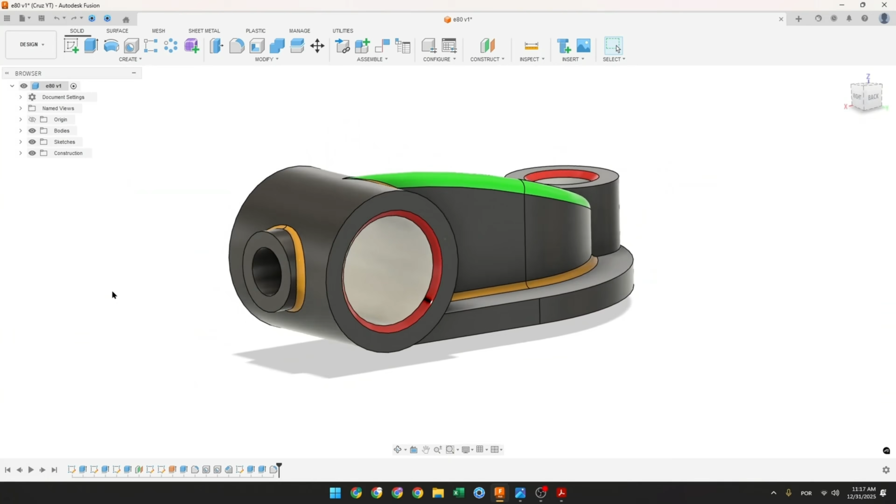Let's make one more tutorial in Autodesk Fusion. In this video, you learn how to use the extrude surface, offset plane, fillet, chamfer, and hole. So open Fusion and let's go.

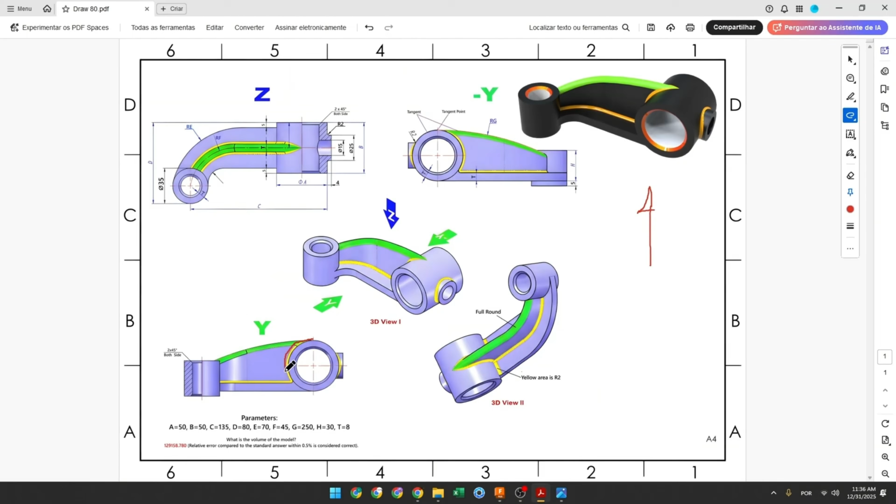The first step to create this part, we will make this cylinder. We will select the front plane. The diameter of this cylinder is A, 50 millimeters, and the length, letter B, is 50 millimeters. Let's create this. Go to create a sketch and select the front plane.

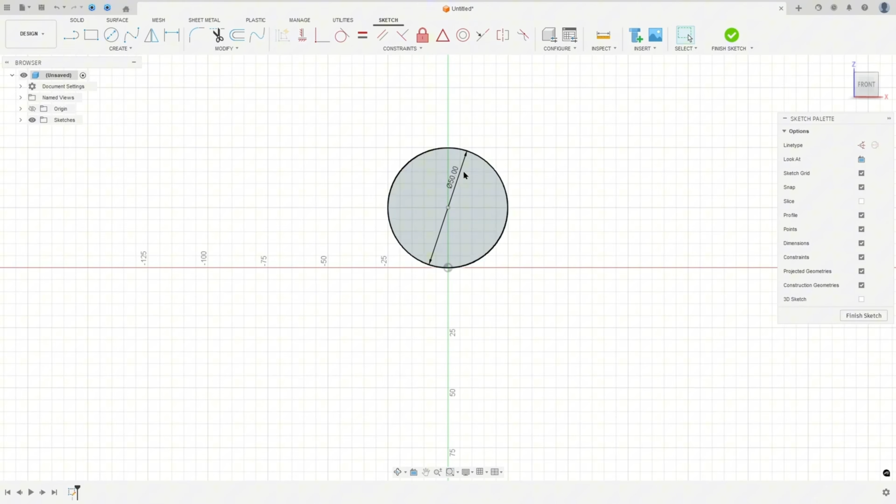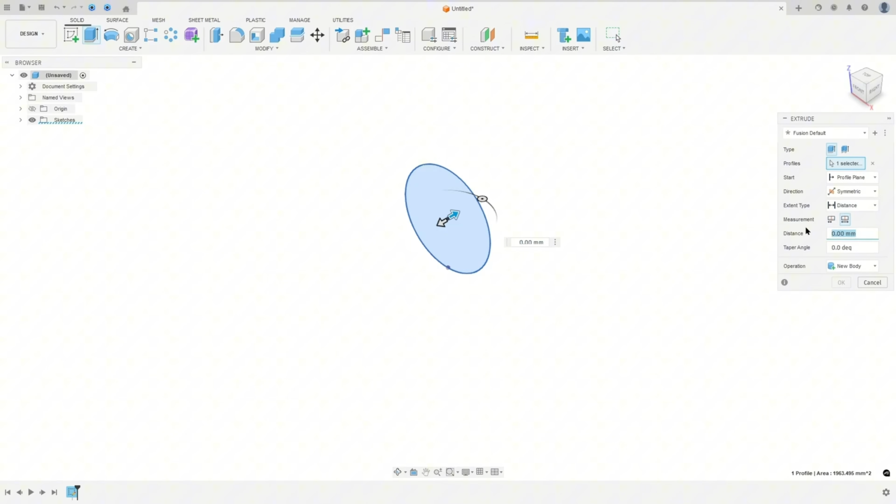Select a circle. Make a circle with 50 millimeters of diameter. Go to constraint, select horizontal vertical, select this point and the midpoint. Select coincident, select this circle and the midpoint. Finish the sketch. Go to extrude. The direction symmetric, measurement whole length, and the distance 50 millimeters. Operation new body and press OK.

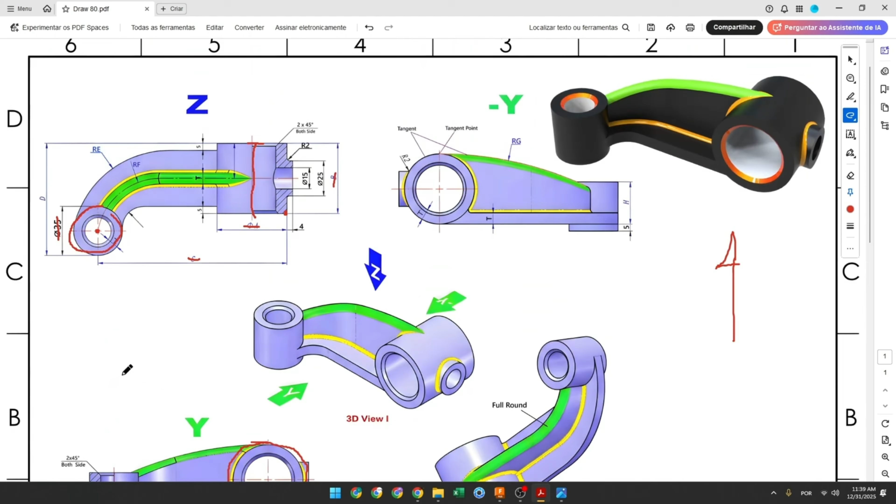Now we will create this cylinder. The diameter is 35 millimeters, and the distance between the center of the cylinder and this edge here is 135, and the distance between this edge here and this edge here is 80 millimeters. So go to create a sketch and select the top plane.

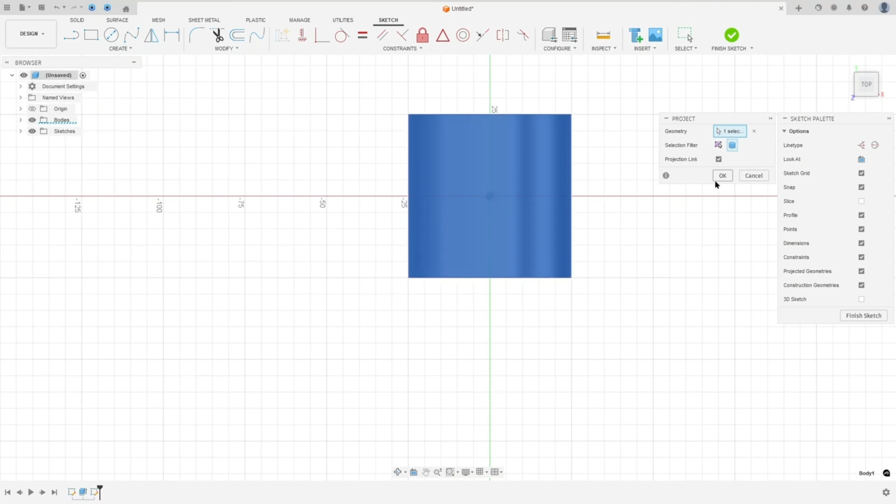Go to create, select project, include project. Selection filter, select the bodies, select this body and press OK. Now select the circle. Make a circle with 35 millimeters of diameter.

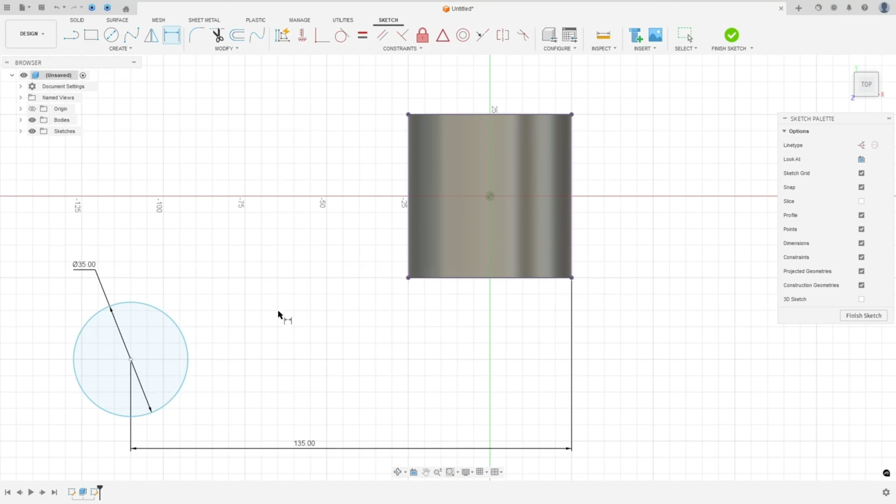Go to sketch dimension. The distance between the center of the circle and this edge is 135. Click here and on this line. Click with the right button here and select Pick Circle Arc Tangent. Select this point here. The distance here is 80 millimeters.

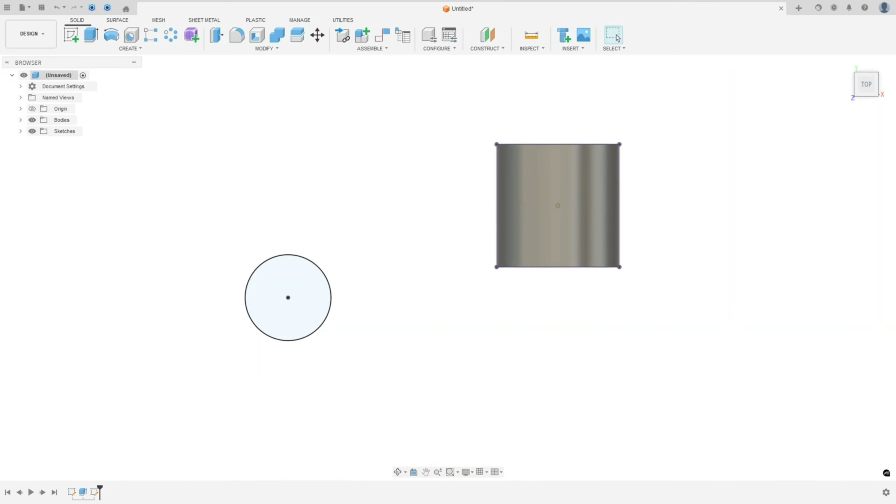Finish the sketch. We need to extrude this 5 millimeters to this side. The plane is here, so we need to extrude 5 millimeters here. And to the other side, we need to extrude 30 millimeters.

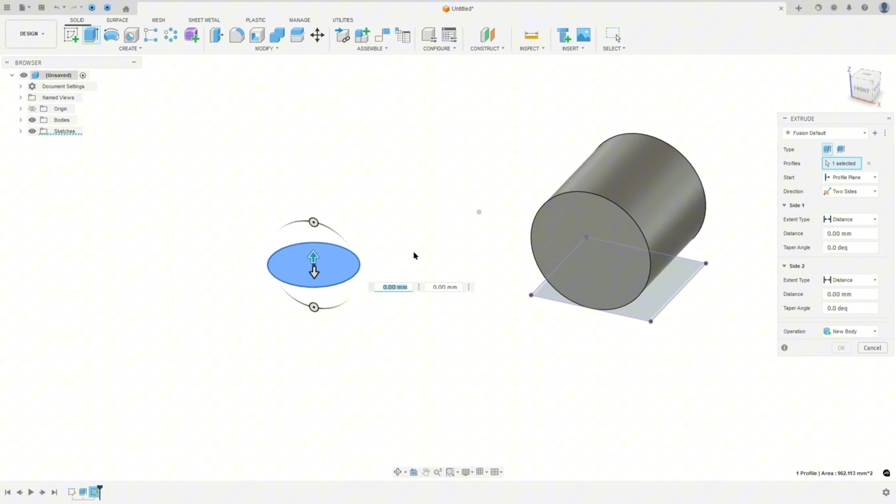So go to extrude and select this profile. The direction, select the two sides. This side here is 30 millimeters and side 2 is 5 millimeters. Operation new body, press OK. We made these two cylinders here.

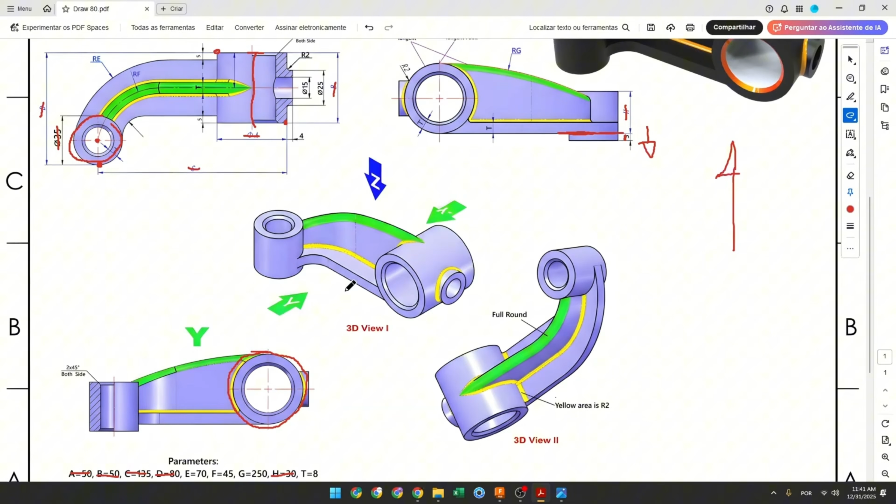Now we'll make the base. So we will create this base here. The base has an arc here, tangent with this circle and tangent with this line. The radius here is 70 millimeters, and the distance between this line here and this line here is 5 millimeters.

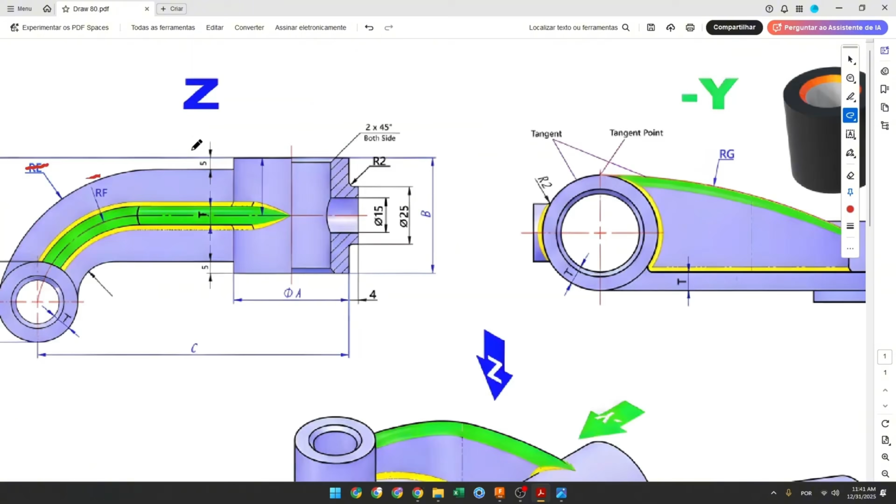So let's create this. Go to create a sketch and select the top plane. Go to create, select project, include project. Select this body here and this one and press OK.

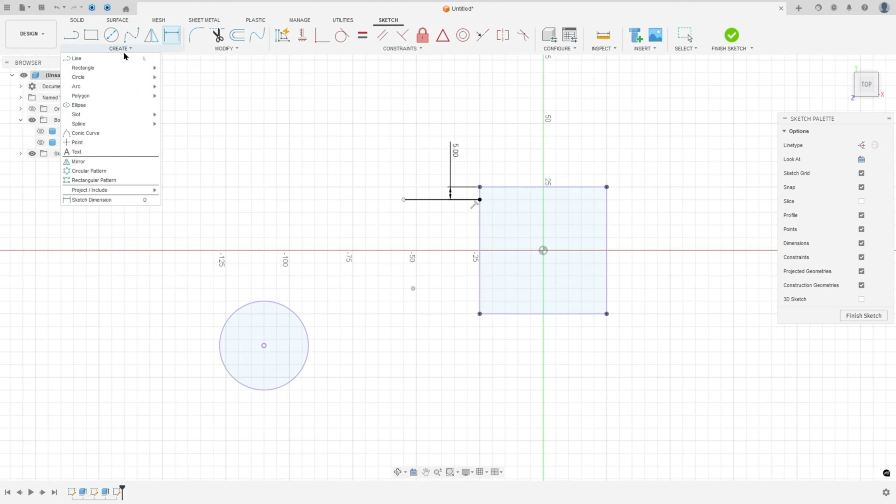I will hide this a little bit. Select line, make a line here. Go to sketch dimension. The distance here, 5 millimeters. Go to create, select the arc, 3-point arc. Click here in this point and this circle, make an arc here.

Go to constraint, select tangent, select this arc and this line, and this arc and this circle. The radius here is 70 millimeters.

Now on the other side here, we have a line with 5 millimeters, and we have a fillet here. The radius here is 15.

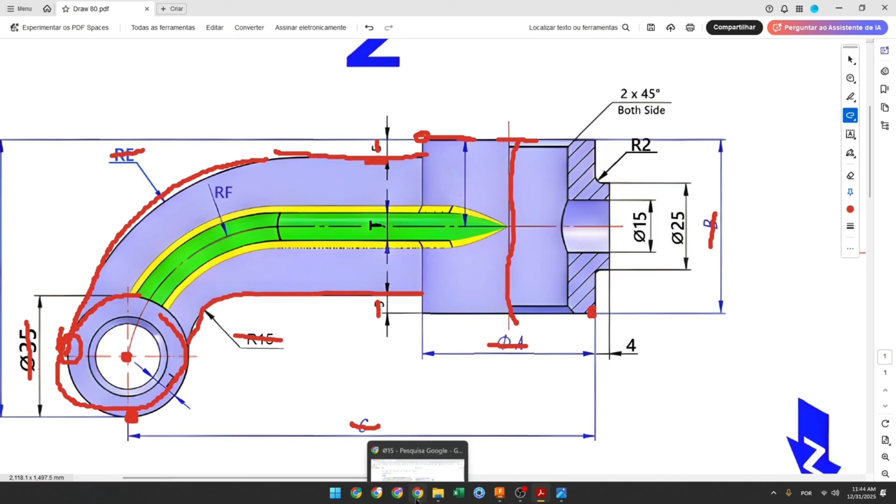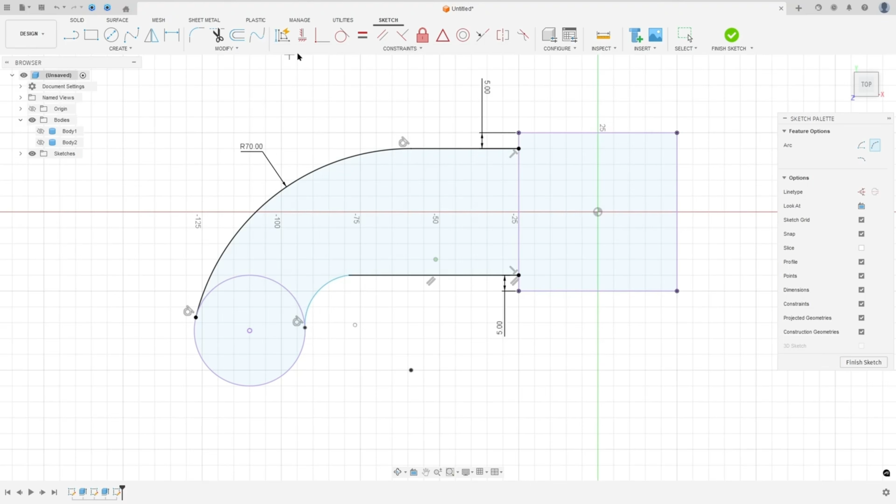So let's create this. Select line, make a line here. The distance between this line and this one is 5 millimeters. Go to create, select the arc, 3-point arc, make an arc here. This arc must be tangent with the circle and tangent with this line. The radius here is 15 millimeters.

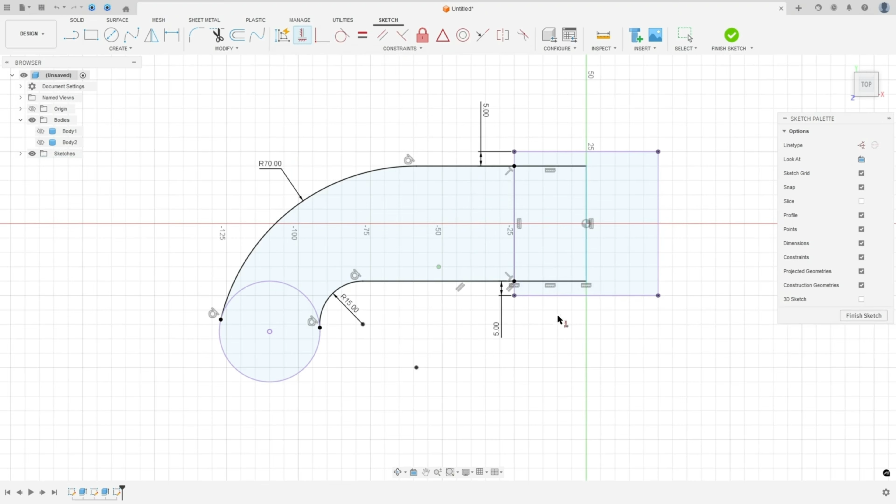And select the 2-point rectangle and make a rectangle here. Go to constraints, select horizontal vertical, select this point, and select this point and the midpoint. We will use this to make the extrusion here, to extrude this side here.

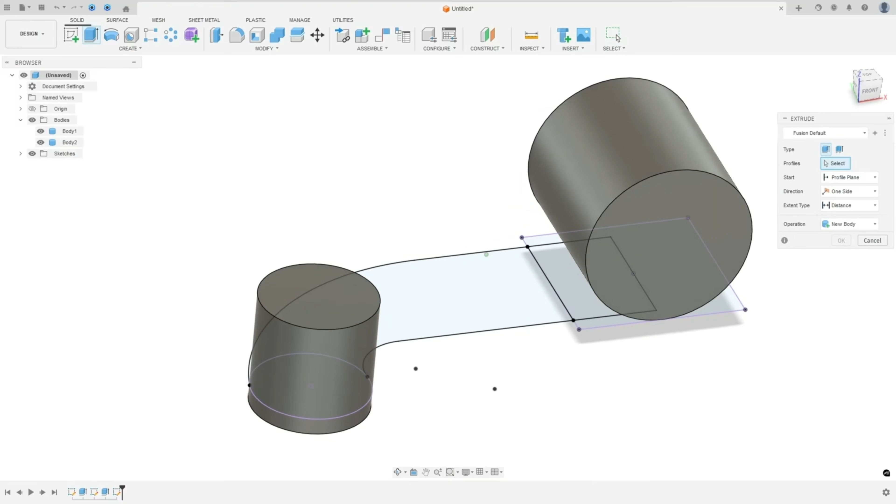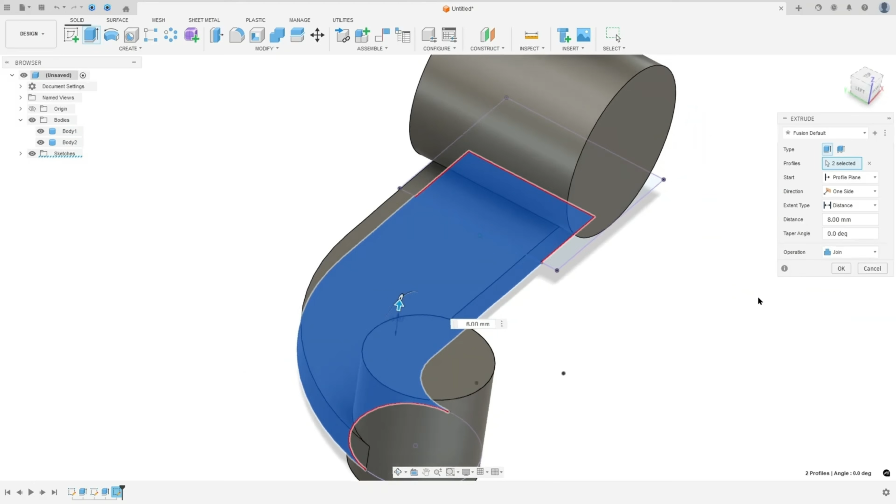Finish the sketch, show body 1 and body 2, and here go to extrude. We need to extrude the base 8 millimeters, letter T. So select this profile. The distance here is 8. Operation join, and press OK.

We made this. Now we will create this pipe here. The diameter is 25 millimeters, and the distance between this face here and this body here is 4 millimeters.

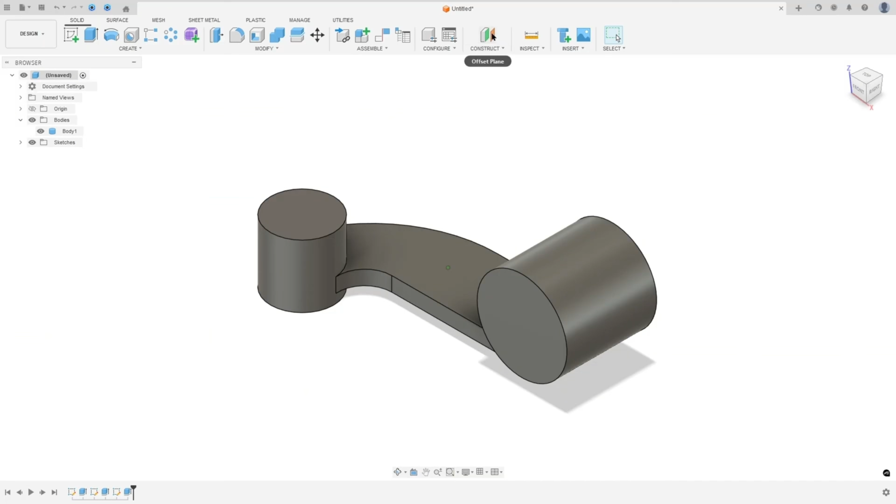So let's create this circle. Go to offset plane, select the right plane. The distance here will be 25, that is the radius of the circle, plus 4, that is the distance here.

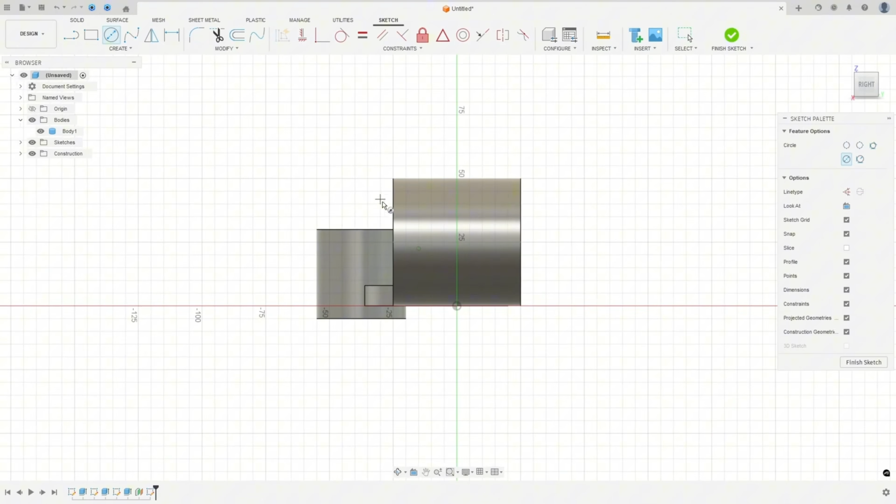Press OK. Go to create a sketch and select this new plane. Select the circle, make a circle here with 25 millimeters of diameter. Go to sketch dimension. The distance between this circle and the midpoint here is 25.

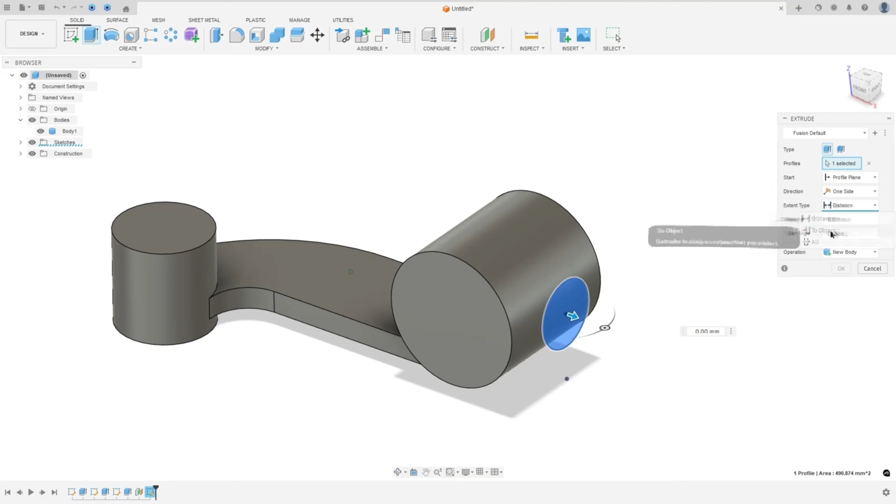Go to constraints, horizontal, select this point and this point here. Finish the sketch. Go to extrude. The direction, one side. The extent type, to object, select this object. The extend, select your adjacent face, operation join, and press OK.

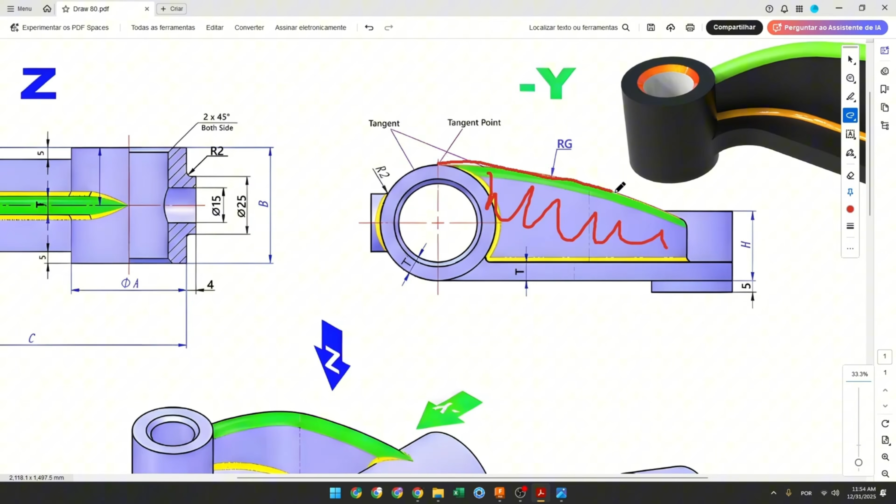And now we will create this rib. The first thing we make to create this, we will select the front plane and create this arc here. The radius is 250 millimeters, and it is tangent with the circle, and the center of this arc is vertical with this point here.

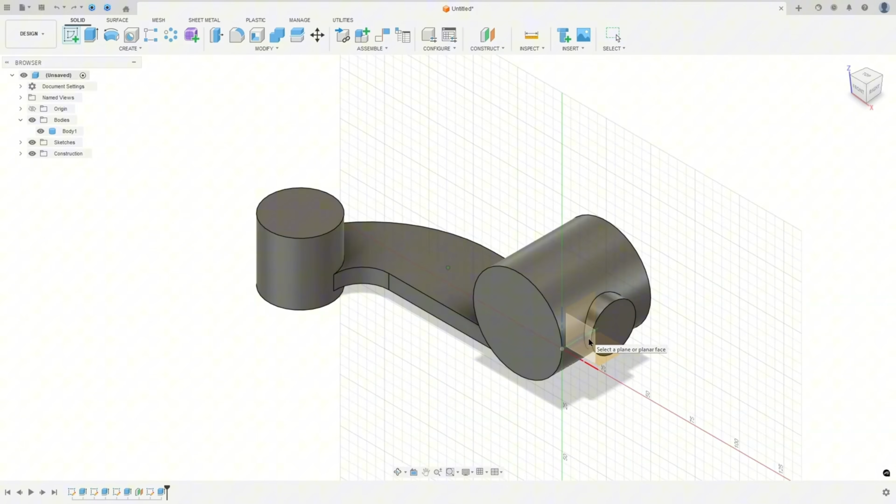So let's create this. Go to create a sketch and select the front plane. Go to create, project include, project, selection filter, select the body, select this body and press OK.

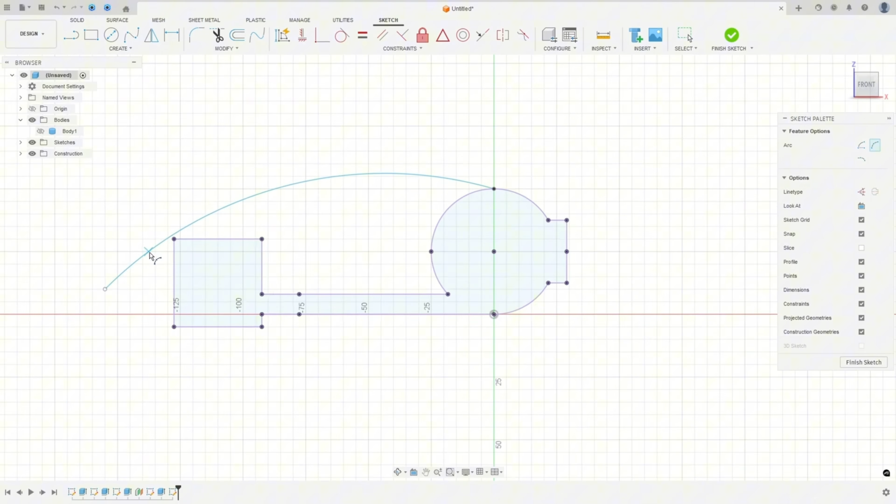Here go to create and select the arc, 3-point arc. Select the circle, make an arc here. Go to constraint, select the tangent, make this arc tangent here. Go to constraints, horizontal vertical, select the center of this arc and the midpoint. The radius here, 250 millimeters.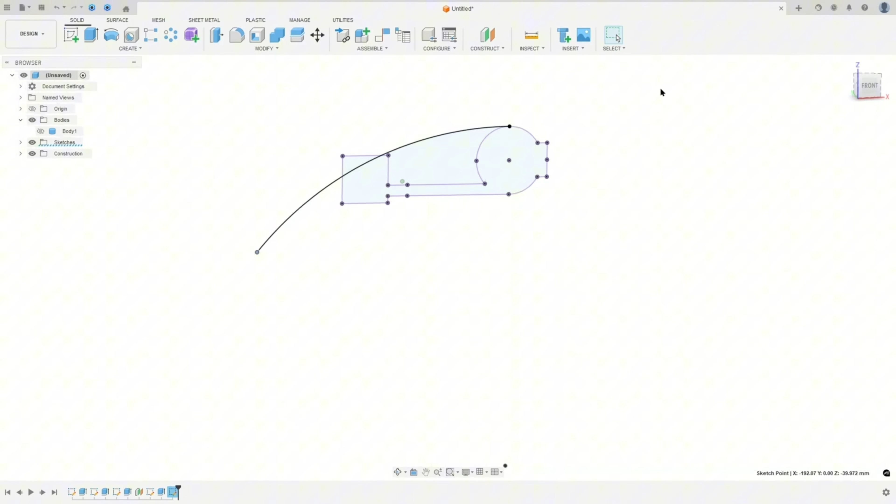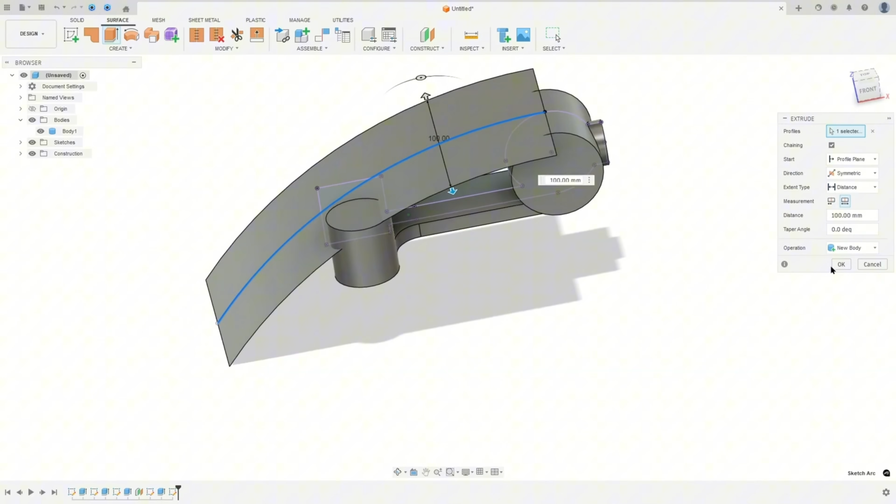And finish the sketch. Now go to surface and select this profile here. Go to extrude. The direction, select symmetric. Measurement, whole length. The distance here can be 8 millimeters or 100 millimeters, no problem. Operation new body and press OK. We made the surface here.

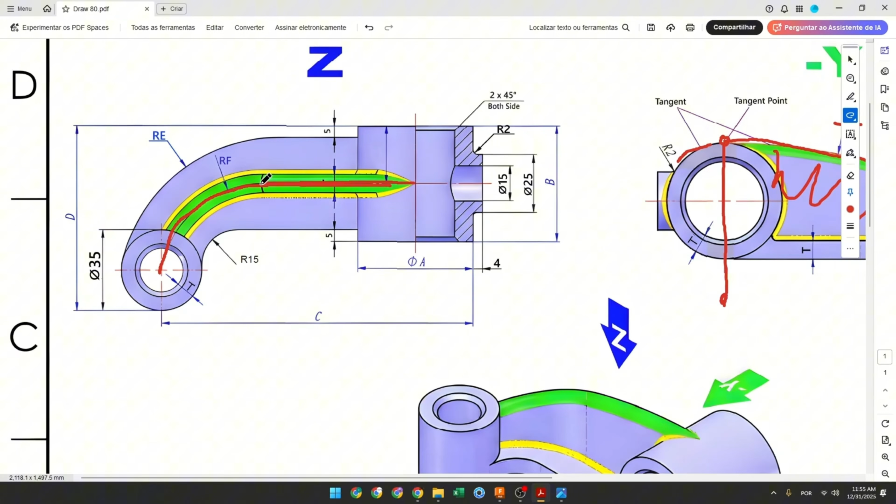Now we will create this profile of this rib. So here we have a line and we have an arc here. This arc has 45 millimeters of radius and it is coincident with the center of the circle. So we'll create this.

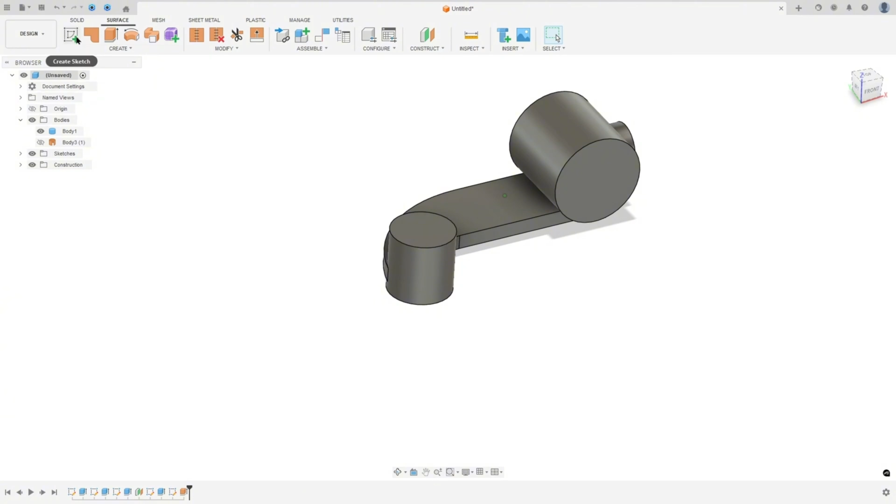Go to create a sketch and select this face here. Go to create, select the Project / Include, project, select this body, press OK, and select a line, click here in the midpoint, make a line here, and make an arc here.

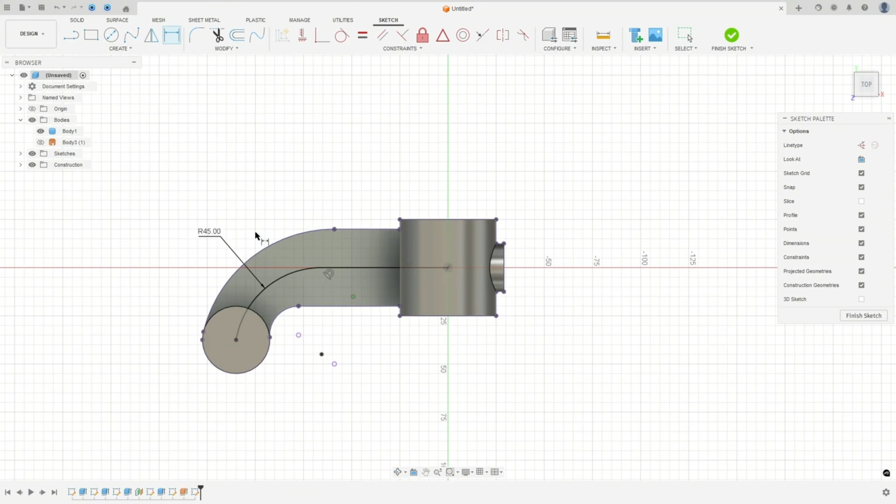Go to sketch dimension, the radius here 45 millimeters. Finish the sketch and show the surface. Go to extrude, the type select thin extrude, the profile select this profile, the direction one side, the extent type select to object, the object select this surface, the operation here is join.

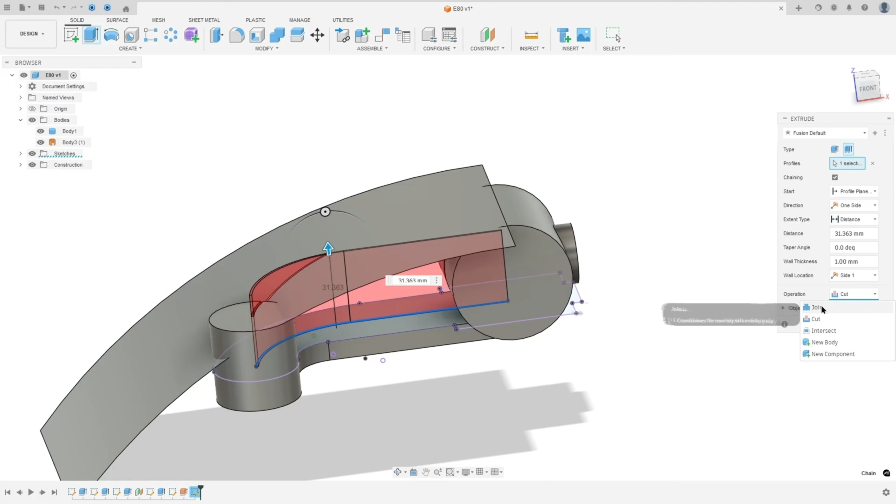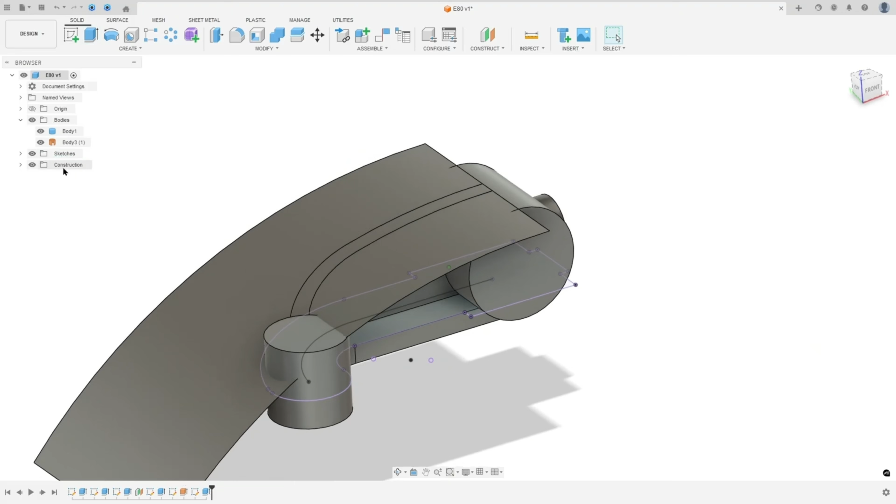Let's change the extent type again, and the extend selected to adjacent face. The thickness here is 8 millimeters, and the wall location selected center. Operation join and press OK. I will hide the surface and hide the sketch.

Now we will make the fillets. So in the green area, full round fillet. In our case, we use the 4 millimeters for both edges. And in the yellow area, the radius is 2.

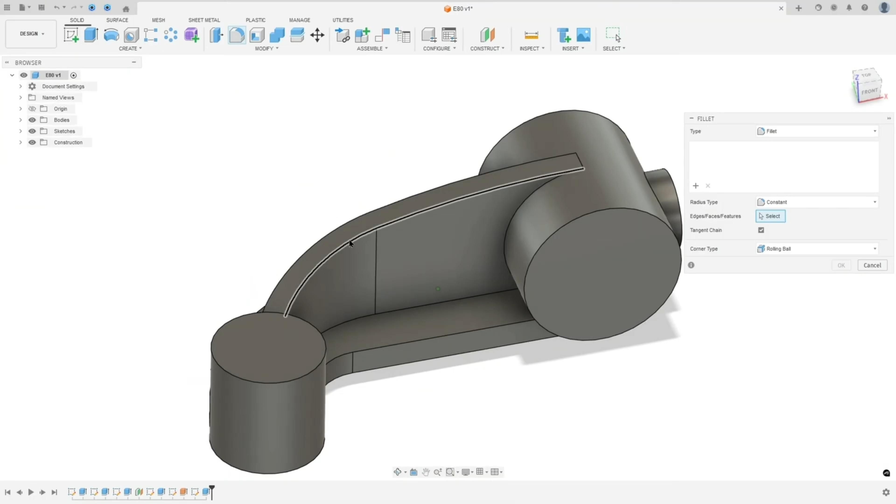So go to fillet, select this edge and this edge. The fillet here is 4 millimeters. Add selection set, select this edge here. The fillet here is 2 millimeters. And add selection set, select this edge here. The fillet here is 2 millimeters. And press OK.

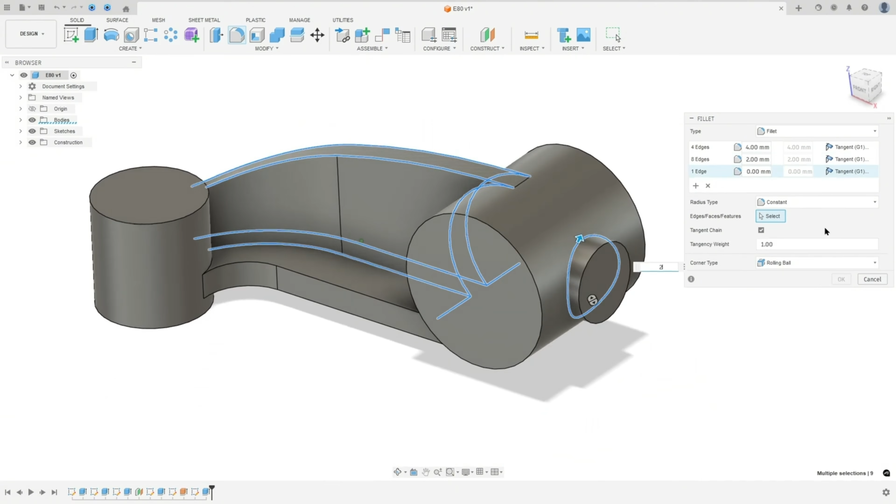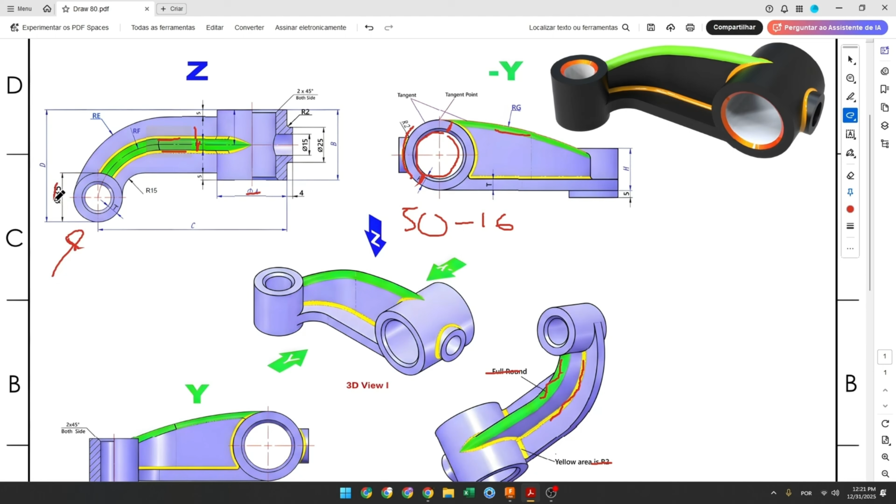Now we will create the holes. So the hole here, the diameter is 50 millimeters. And this hole here will be 50 minus 16. We have 8 millimeters on this side, plus 8 millimeters on this side. The same case for this one will be 35 minus 16. And here we have a hole with 15 millimeters of diameter.

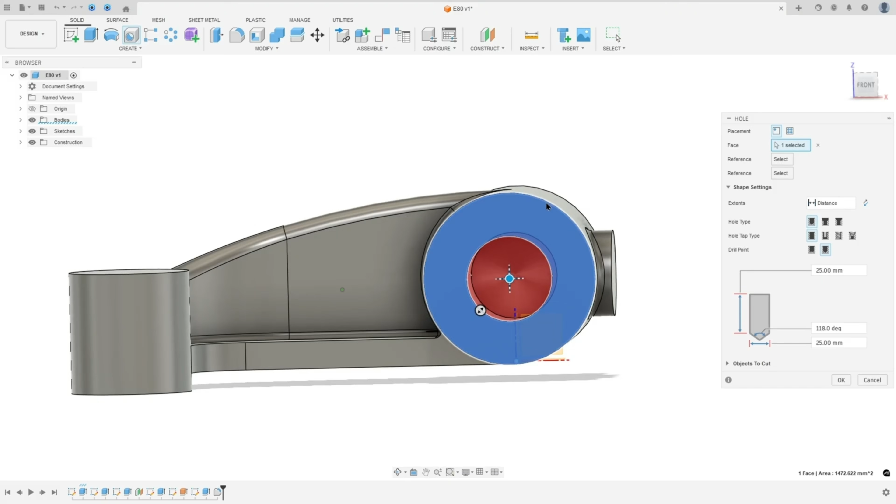So select the hole, select this face, move this to the center, to the white point, or edge reference, select this edge, and the extents, select all. The hole type simple, hole tap type simple. The diameter here 50 minus 16. Press OK. Go to hole again, select this face.

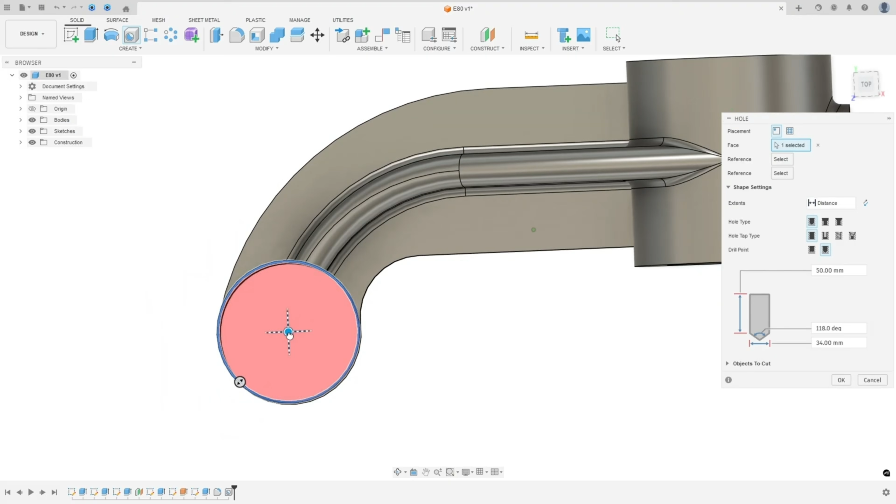Move this to the white point. The diameter here 35 minus 16. The extents, select all, and press OK.

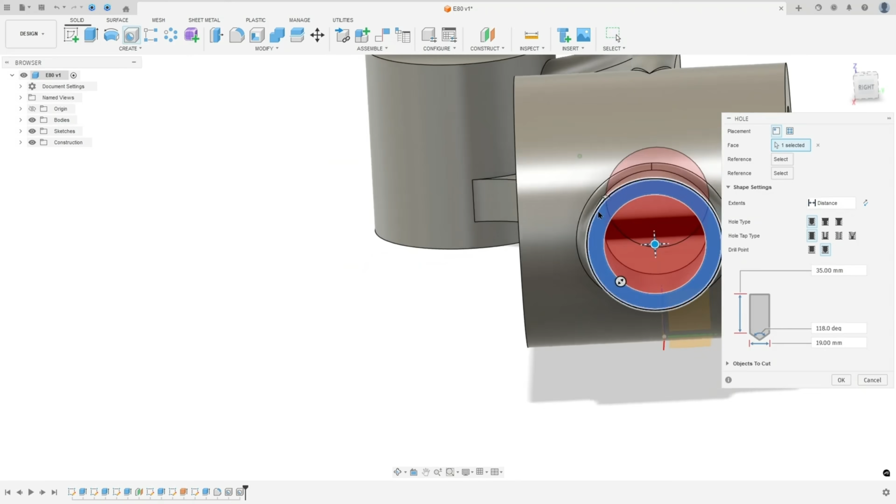And on this side, select the hole, select this face, move this to the white point. It is the center here. The hole type, select simple, tap type simple, drill point flat. The diameter here is 15. The distance here we use 25. And press OK. We made this.

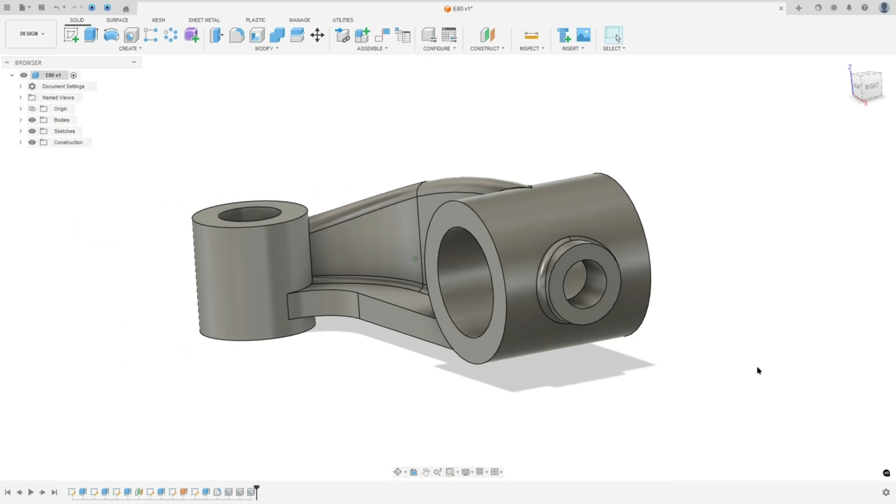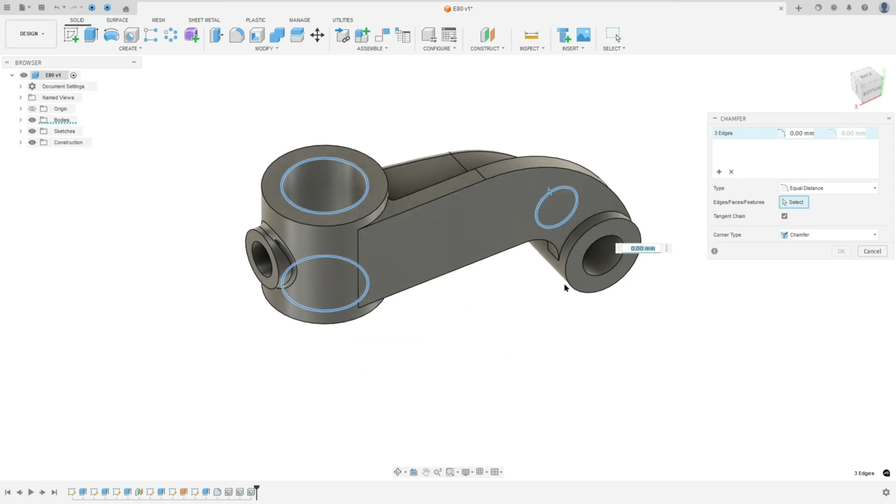Now we need to create the chamfer here. The chamfer is 2 millimeters on both sides for this pipe and for this one. So go to modify, select the chamfer, select this edge here. And press OK. Let's check the volume of this model.